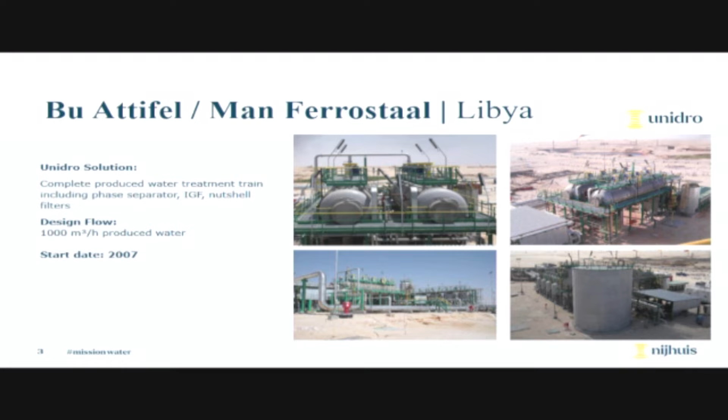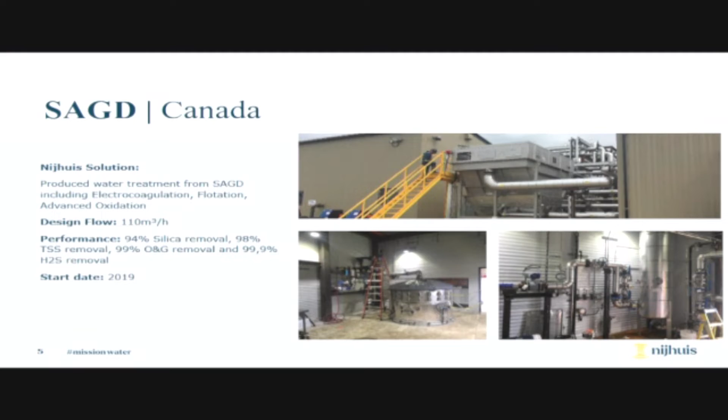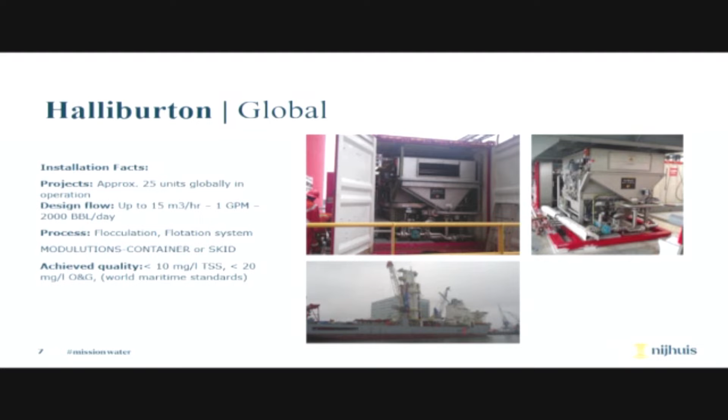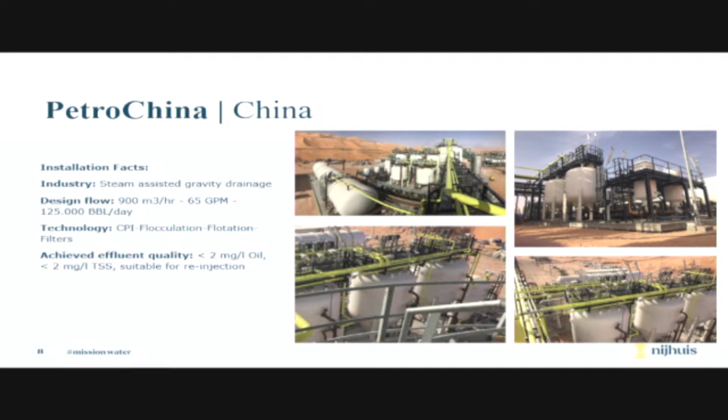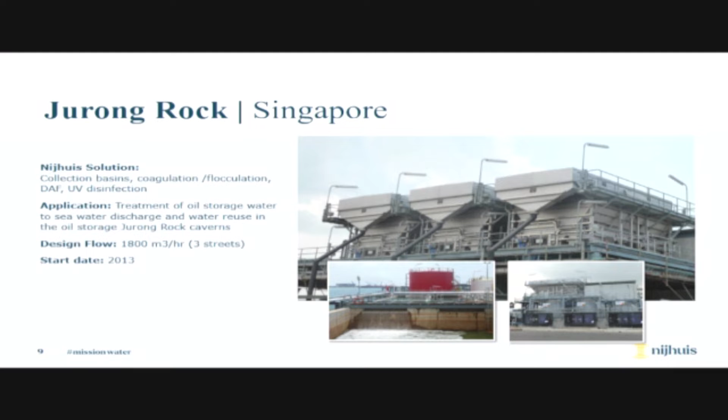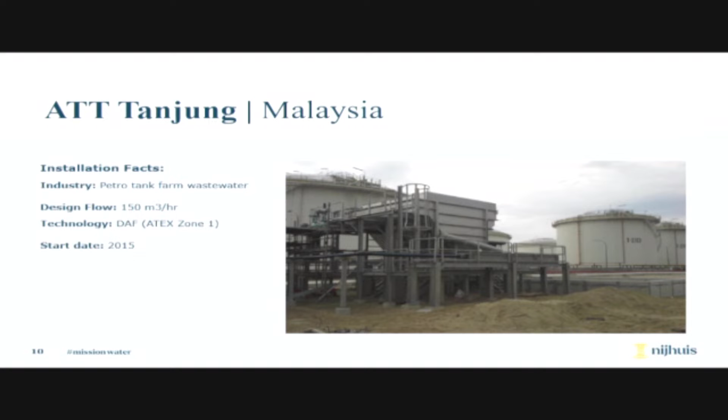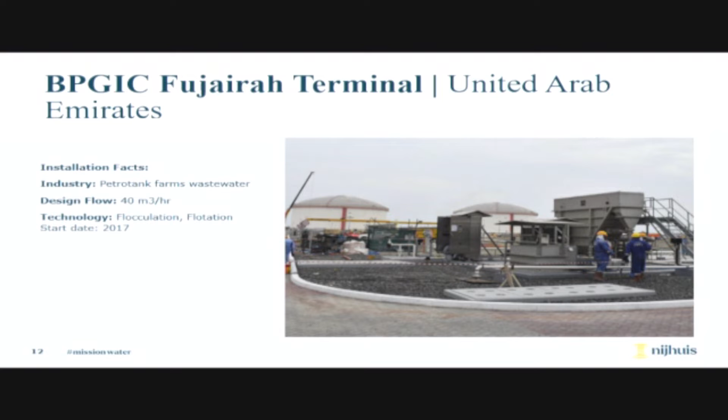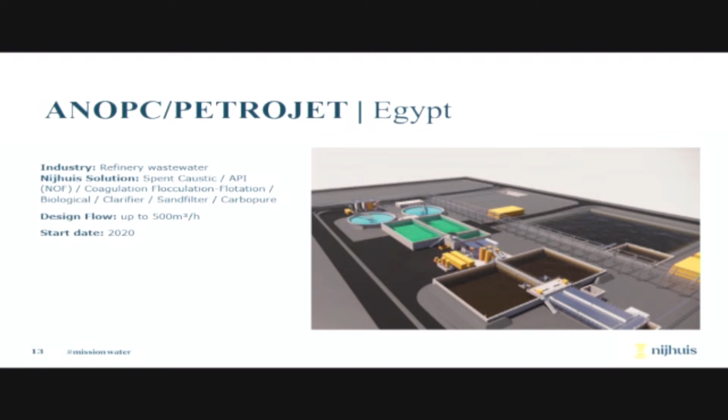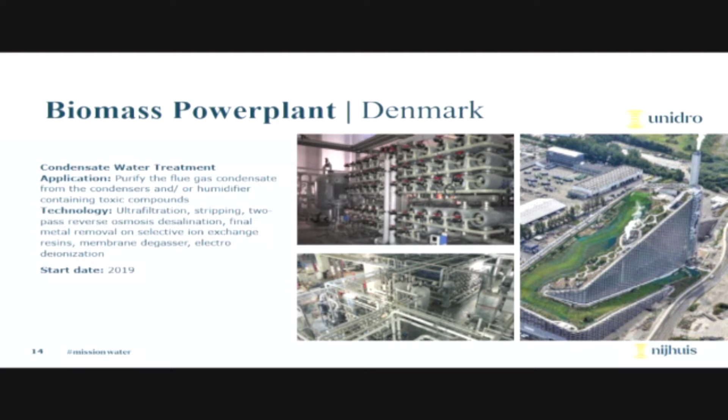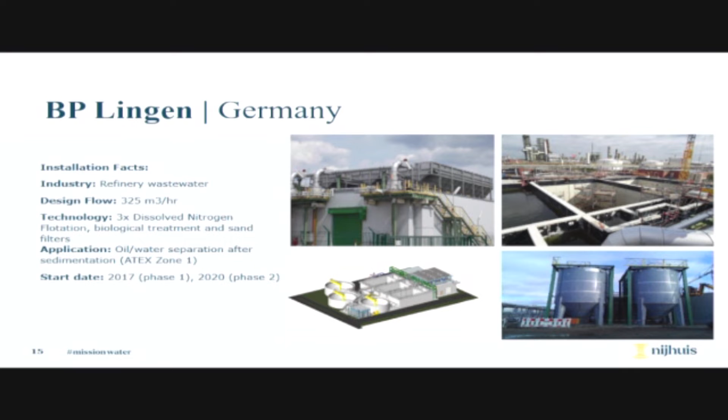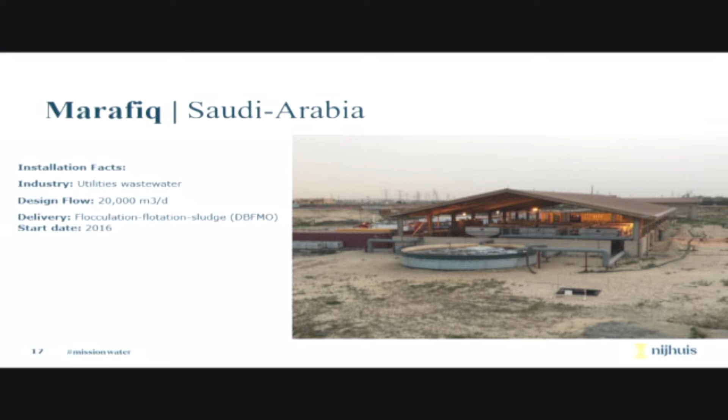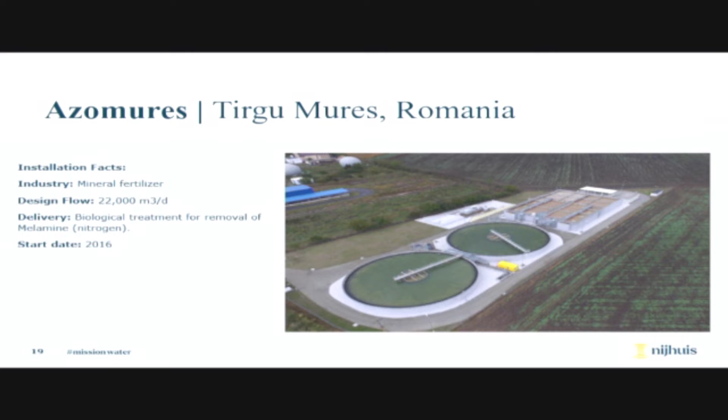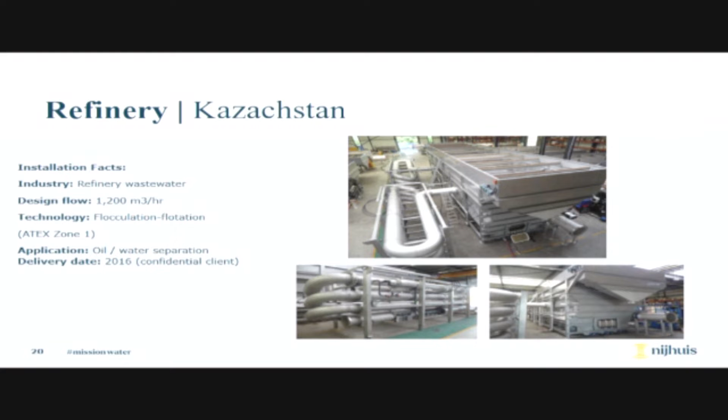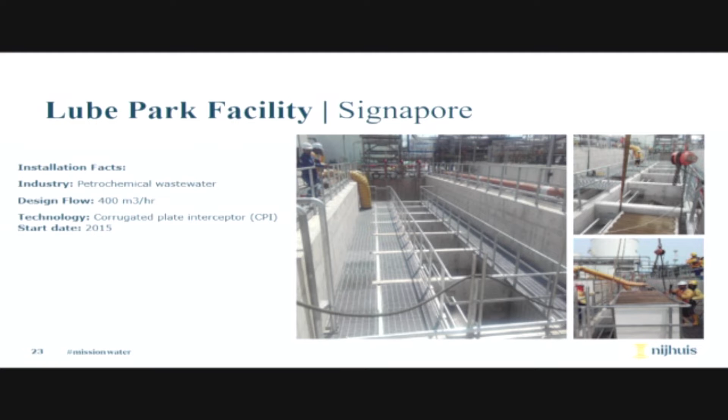Singapore, it's petrochemical wastewater, 400 cubic meters an hour.

So food and dairy industry, this has actually been for years a core business for Nijhuis Saur Industries, for more than 100 years. So therefore I also wanted to mention a few projects for you.

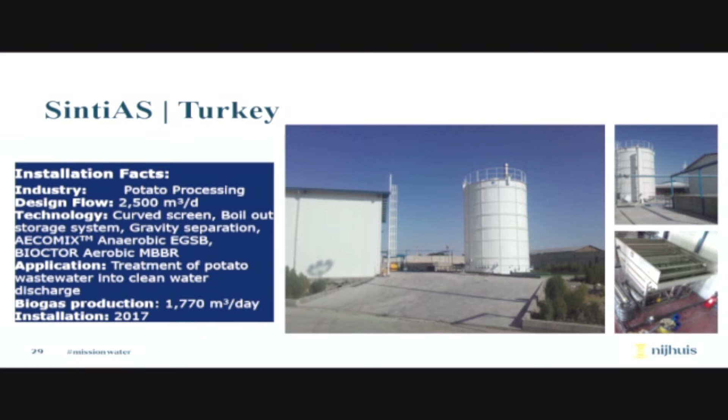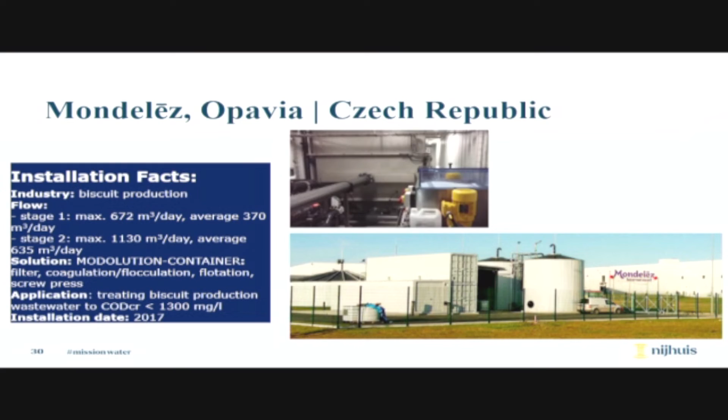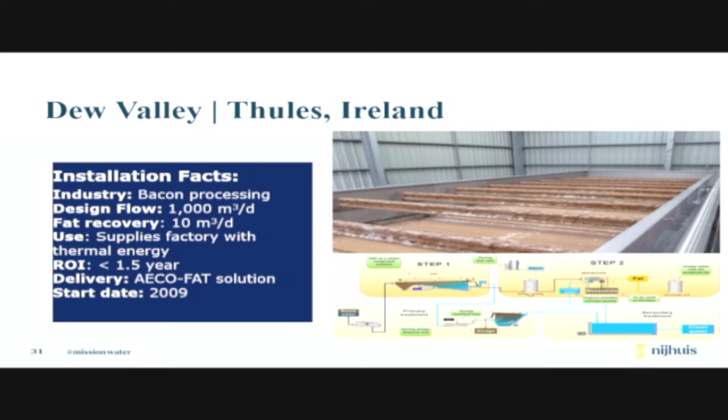Dew Valley was in the previous slide, and that was a bacon processing plant. Besides that, we also extract fat, which can be used further as biodiesel on this plant, using the technology of Nijhuis Saur Industries.

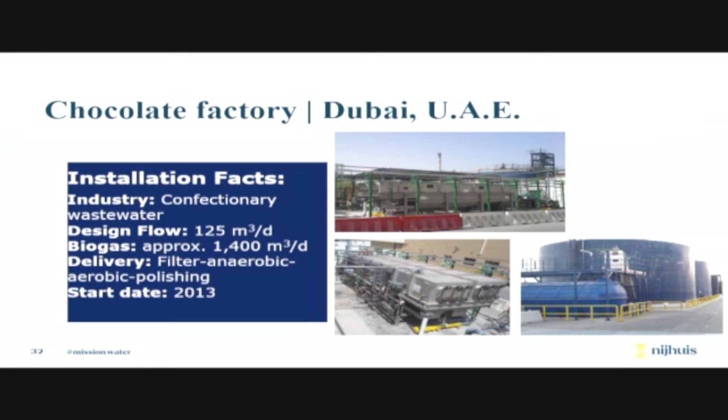So chocolate factory in Dubai. This is the biogas plant of Nestle in Russia, which produces biogas, allowing this plant to be self-sufficient with respect to heat.

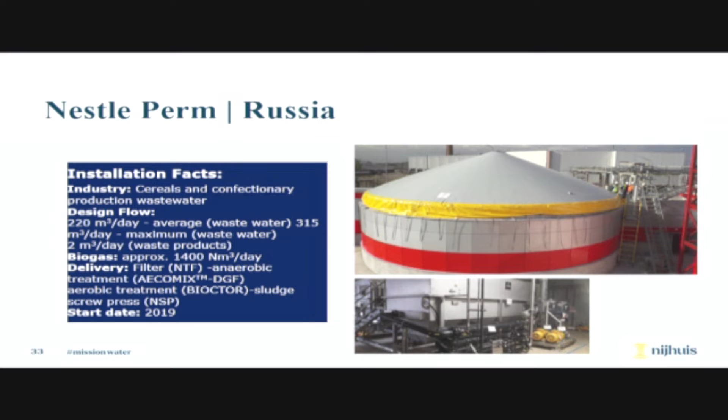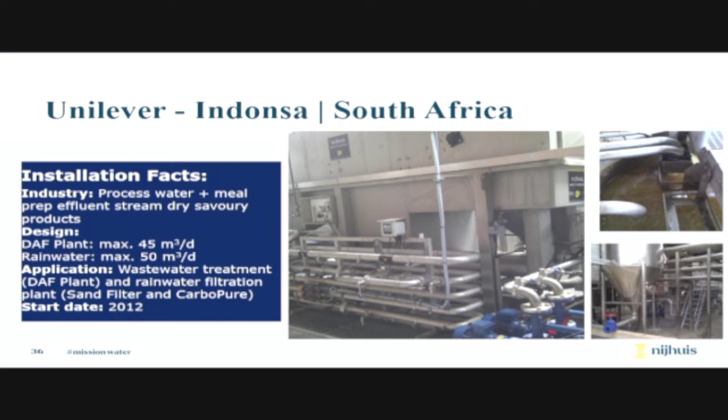So we have different references, and I think the reference list in this industry, out of the food industry, is the most extensive. I think we have more than - Emil - 500 references worldwide in this industry, or even more? Almost 800, yeah, thank you.

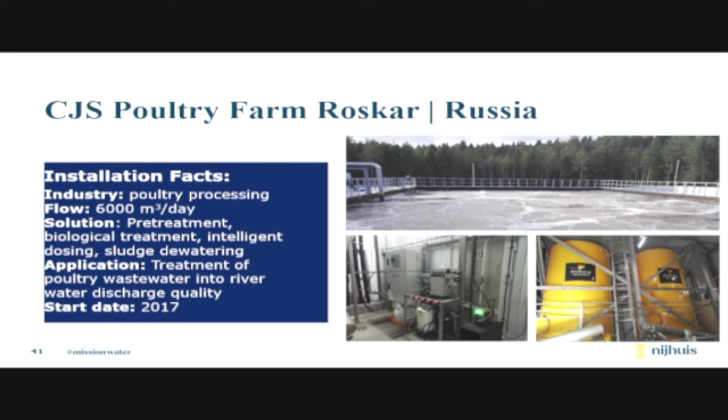You can see here the project in Russia. This is Roskar, and this plant was done around 2017, in cooperation with the company Hach Lange, who is also present here - our colleagues. Here we installed our system called IDOS, and they helped us a bit with that. So what's going on at this plant is we are online measuring the quality of the wastewater, and based on this analysis we automatically dose the required chemicals, which reduces the amount of chemicals at the plant by up to 30%. So quite a lot.

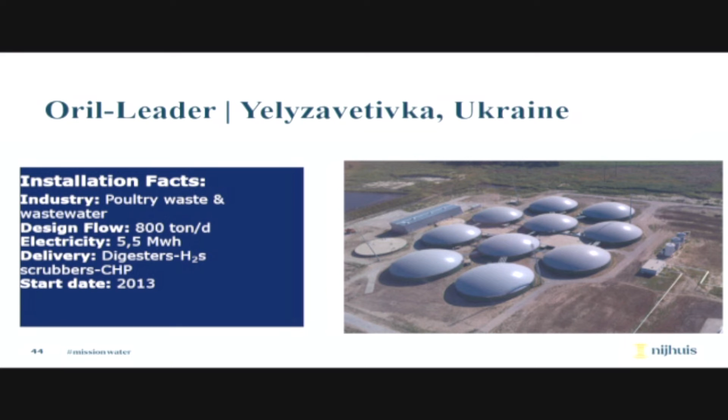So Prioskolia, it's poultry production. Al Watani in Saudi. Oril-Leader, this is a Ukrainian project, and this is a huge biogas plant - the total output of this plant is 11 megawatts, and the electricity output is 5.5 megawatts. So it's huge, one of the biggest European suppliers

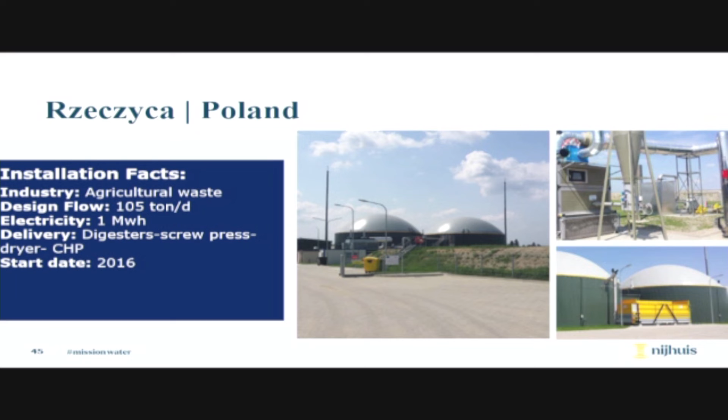of chicken. So this is Rzeczyca, Poland, 105 tons a day of wastewater, and it's 105 tons of substrate and 1 megawatt.

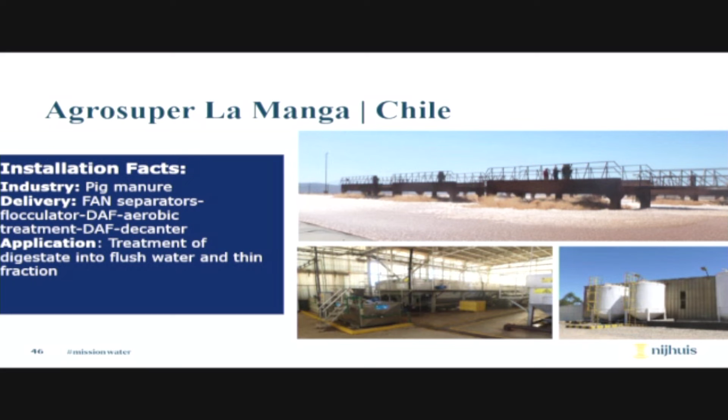AgroSuper in Chile, pig manure processing.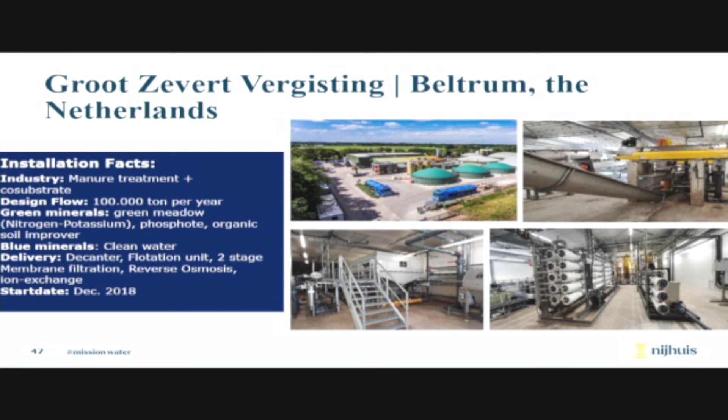Okay, municipal references. I also heard that municipal references are very important, so I will go a little bit faster.

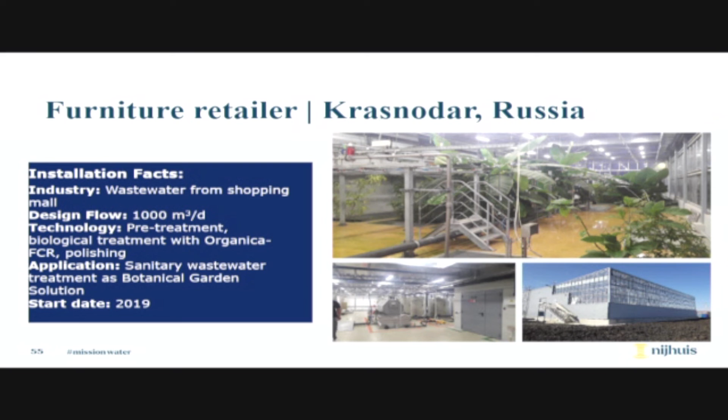We have different references in Canada, Belgium, France, USA, Singapore - this is the concrete flotation pretreatment system. A one-step filter, it's a polishing step in the Netherlands. It's a Krasnodar plant with trees, and on the roots of these trees bacteria grow to treat the wastewater. I could just mention that.

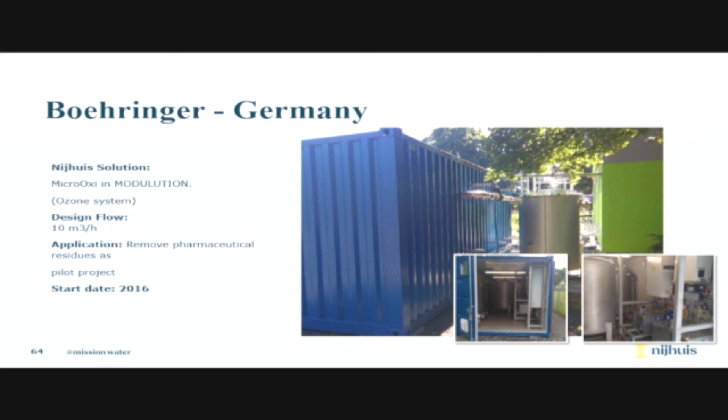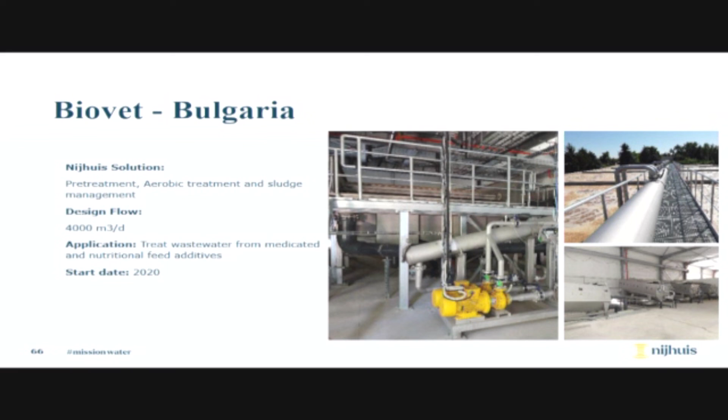Okay, that's it, thank you for your attention. We were a little bit late with our presentation.